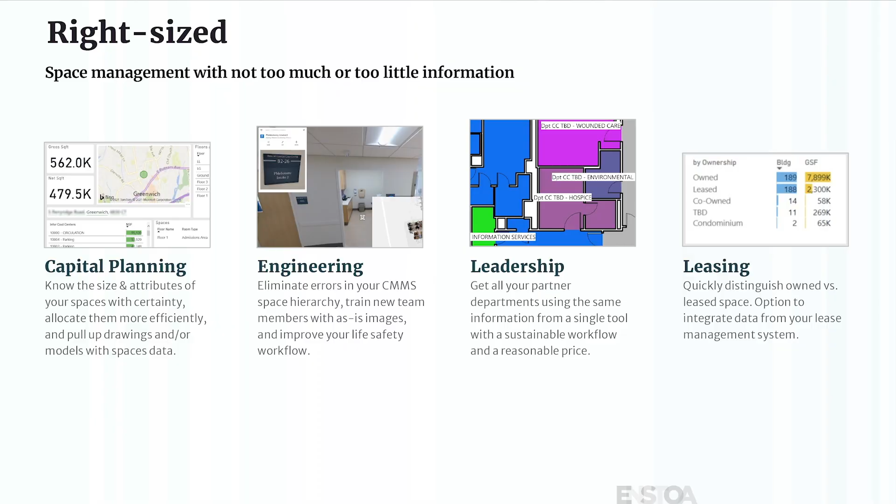It is accurate and comprehensive. It allows the capital planning teams to go from plan approval to design start. We can skip those tedious, difficult steps of site surveys and getting design partners out to take pictures and model the existing condition, because they can get access to all that information. The engineering teams can look at assets on the 4th floor, in the equipment room, from their desk, across town or in another state, because we can capture the X, Y, Z coordinates of all the assets in the existing building.

The leadership team can run space scenarios, discuss move plans and consolidations, and do that with the confidence that they're working off of a rock-solid baseline, working with their real estate partners to do so.

And it's not just those key groups in the built environment. When we went throughout a hospital system, we found there's a lot of people with space inventory needs - a lot of spreadsheets for bed management, security, IT, environmental services, even the treasury group. There's a lot of people with that space spreadsheet, and guess what? It's not accurate, because it wasn't accurate based on the information in the first place. As time went by, it just increased in its inaccuracy, and it makes scenarios that you all need to produce really difficult and time-consuming.

People lack confidence. Enstoa was part of a group with ASHE and with FGI to develop space nomenclature standards and equipment classification standards. That was really, really important. It took us years to do that, so we could quickly catalog spaces and map them into the right categories.

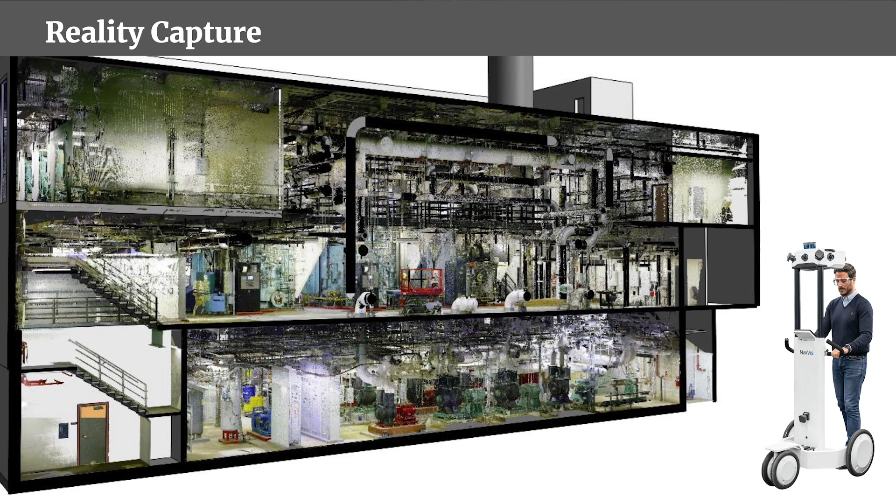There's an Enstoa associate who's a bit teched out, using a combination of point clouds, LiDAR and photogrammetry systems that quite literally zooms around the hospital, around the buildings - anywhere from 50,000 to 100,000 square feet a day - and captures the imagery.

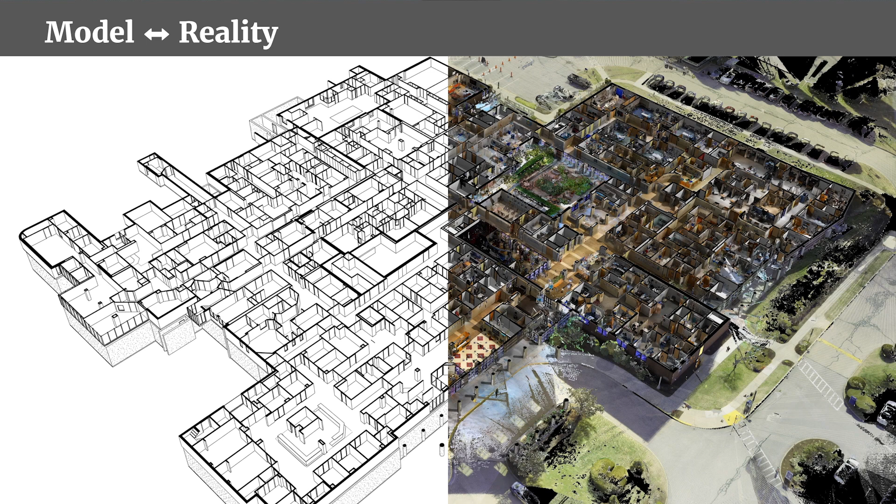That is then used to produce a 3D model, basically a Revit file of the existing condition, capturing also the imperfect, because that is reality.

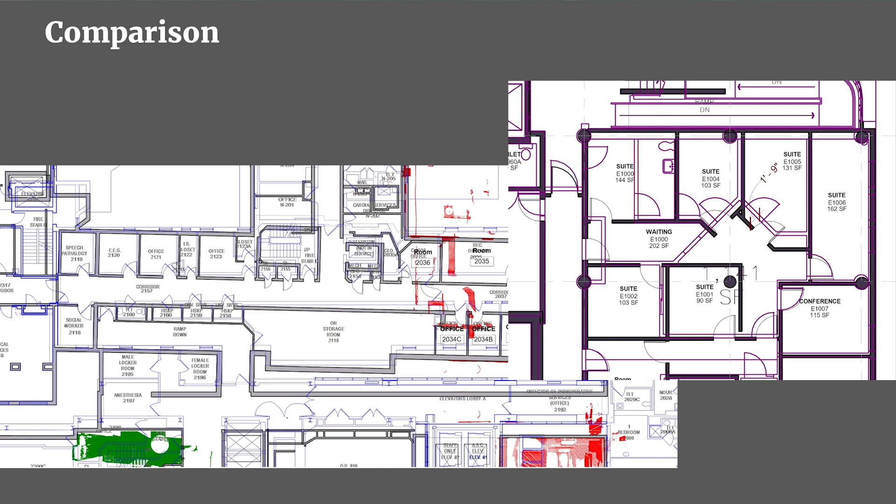We're then able to do a compare against existing documentation. Let's say you just finished a new building and you have an as-built model - we get to compare against that. Or you've got PDFs of drawings sitting in the archive room, and we can compare against that. You can see an example of an overlay here where the building itself is way off, and walls are in different locations. One case we finished recently, the building was 9% larger in square footage than the plan.

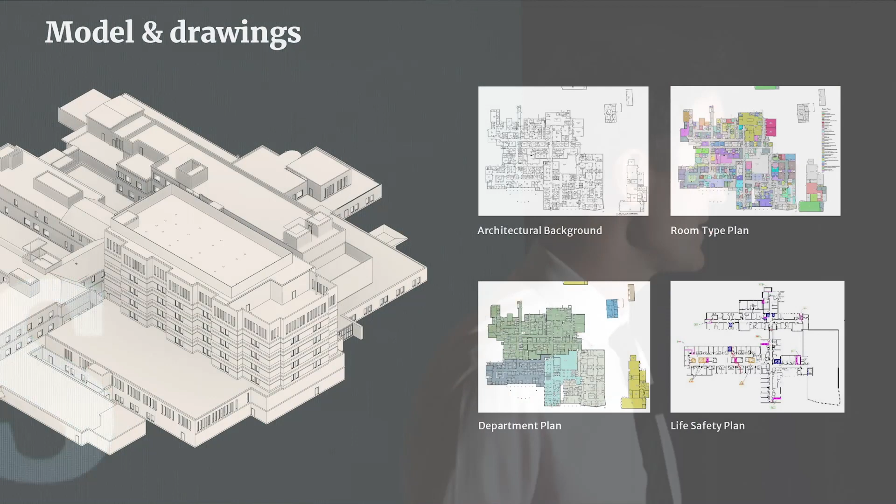So we'll still compare against the existing conditions, but reality trumps, because things change as you move through construction, and certainly over the course of many renovations over the years. We then produce the classic documentation organizations need: architectural plans, room types, department plans, life safety plans.

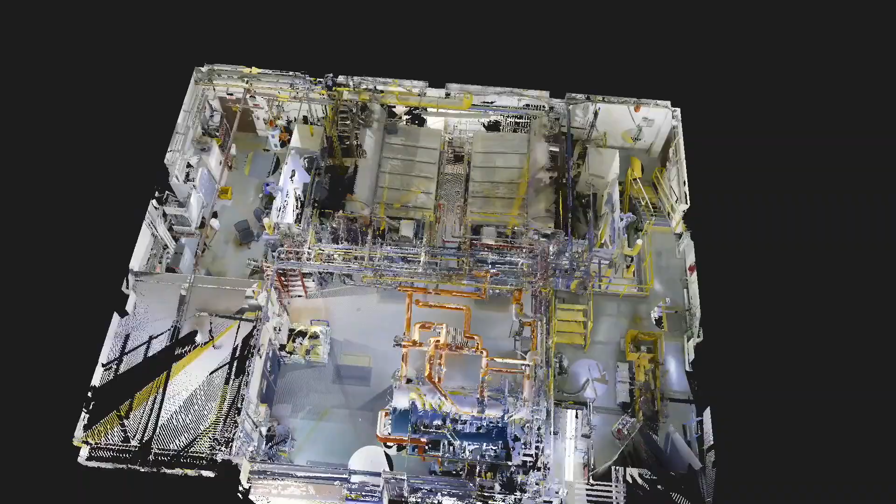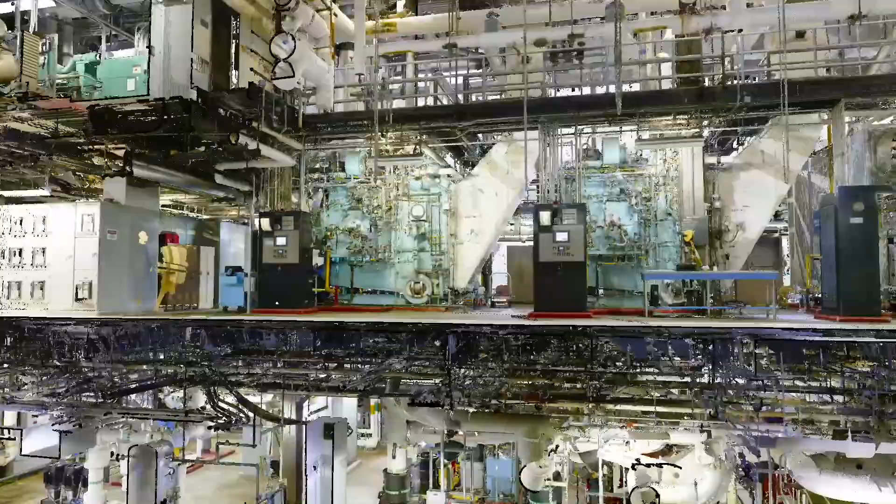Plant rooms are really complex systems to understand and route. There too, we're able to model down, not to the tiny wire, but to a lot of detail of the plant room, giving engineers confidence and the ability to trace systems and understand what they have, without having to get ladders and go up to look at that stuff. All of those assets and components are then cataloged as well.

Enstoa, we're a data company. We put a layer of analytics on top of that, and literally from 50,000 feet, we can look down at that portfolio and understand how many square feet we have by department, by building, in regions. What is our mix of owned versus leased space?

We can go from here and drill down into rooms. We have information on the use of the rooms. So we have an analytics layer that sits on top of that database.

The architecture's pretty simple. We use Revit, like many of you do, and you can think of Revit in our case as the database - we just make that database really robust by hanging additional attributes off of it. We use BIM 360 as essentially the cloud file storage. We use NavVis for a lot of our equipment capture, and they have a cloud product that gives us that street viewer equivalent. Starfish Spaces acts as a wrapper around these things, again with that analytics layer on top, maintaining security and ease of access for end users.

There are some additional things we can do. I do get asked, what about going above the ceiling? What about helping update those models more frequently? We can do all those things, and integrate that information into financial systems, even Epic, or into your computerized maintenance management system.